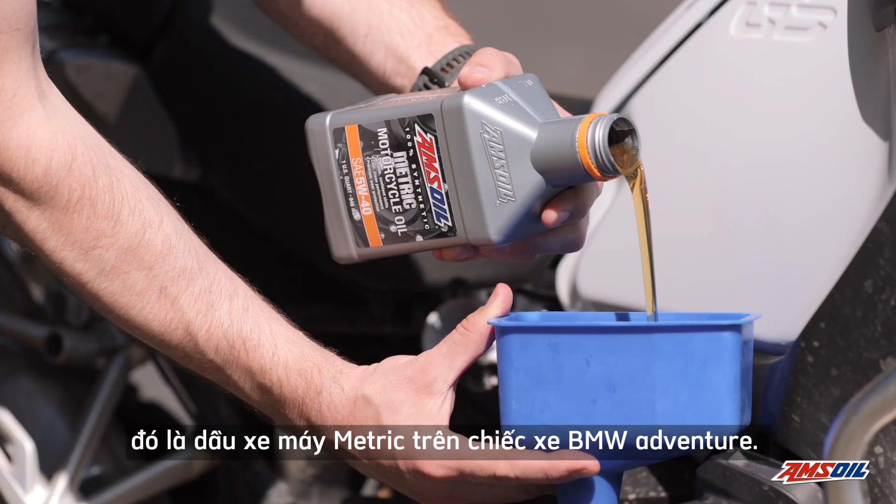Amsoil tested metric motorcycle 5W40 in a BMW R1250 GS. Let's see how it performed. At Amsoil, we're always testing our products. In this case, it's our metric motorcycle oil in a BMW adventure bike.

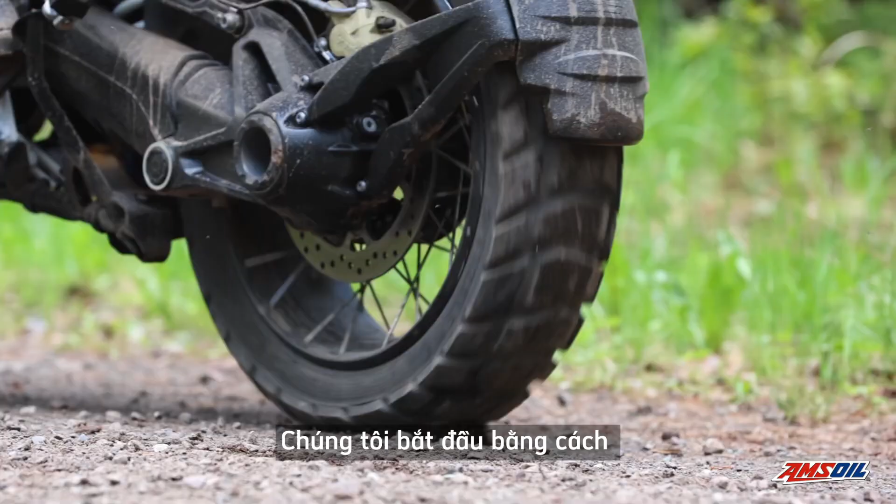So we ran at Amsoil what we call a proof of performance, or a POP. We start this out by putting a full array of sensors on the motorcycle. Then we're going to take it out and ride it in all of these different scenarios. So we did some off-road riding, we did some on-road, we did some in-town, we did some highway cruising. We basically covered all aspects of the adventure bike model, if you will.

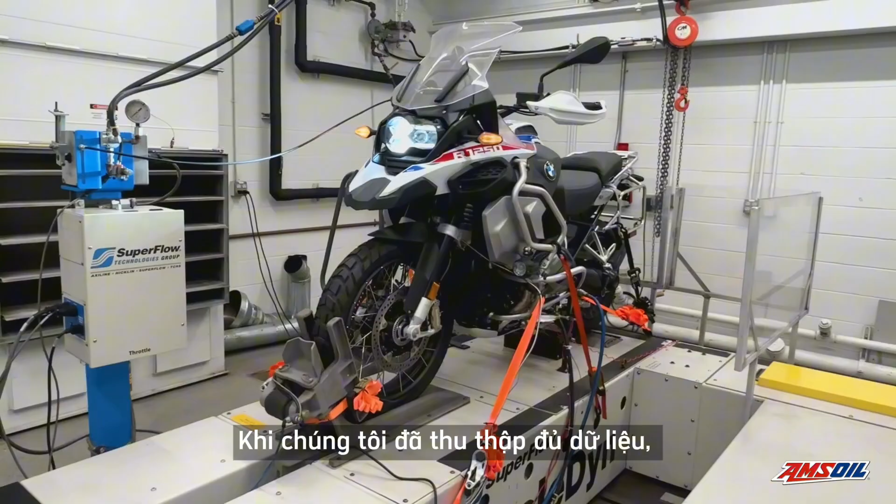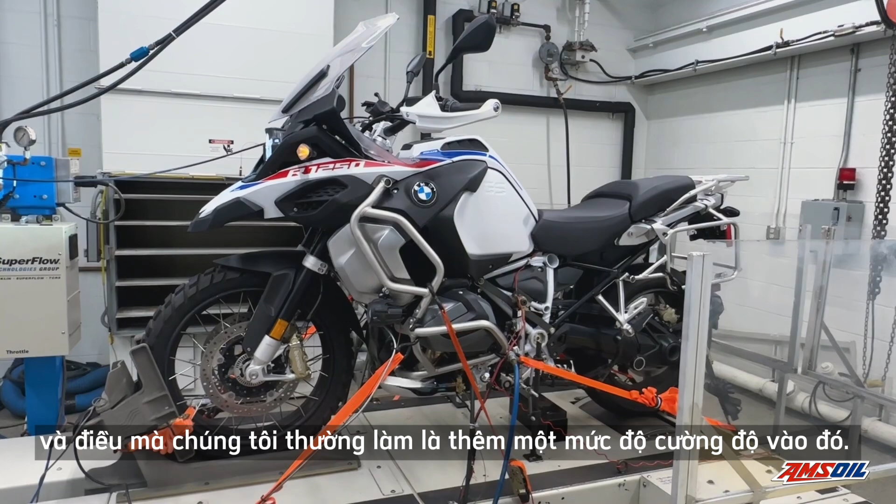Once we have all the data collected, it's off to the dyno. We will take all of that data that we've acquired and we'll replicate that. And what we normally do is we will add a level of intensity to that. In this case, we were 10 to 15% above what we saw in those different scenarios.

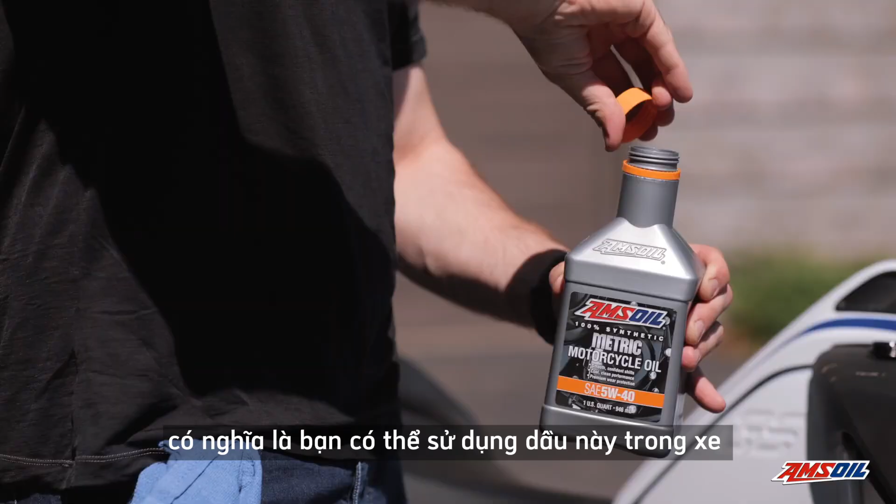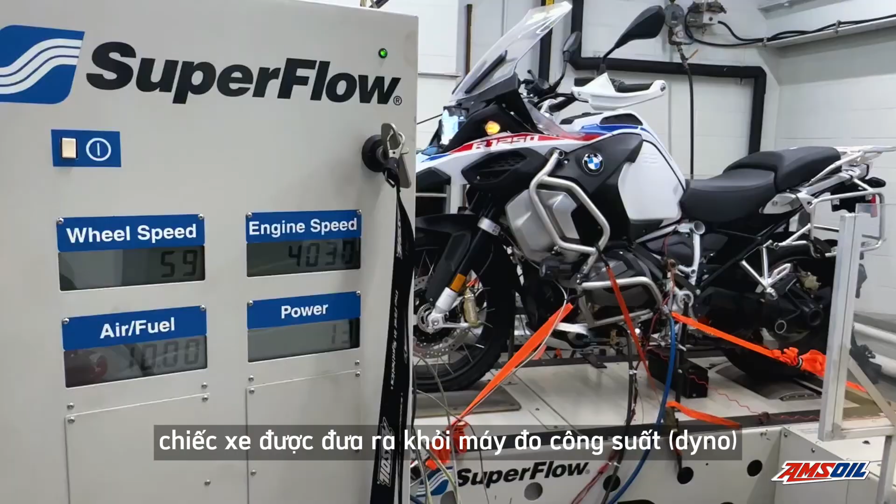The Amsoil metric motorcycle series of products comes with a 2x OE drain interval, which means you can keep it in there 2 times the manufacturer's recommended drain interval. Now, in the case of the BMW, that's 12,000 miles. So at 12,000 miles, the bike comes off the dyno and we start looking at the engine. Anything the oil touches, we're looking at.

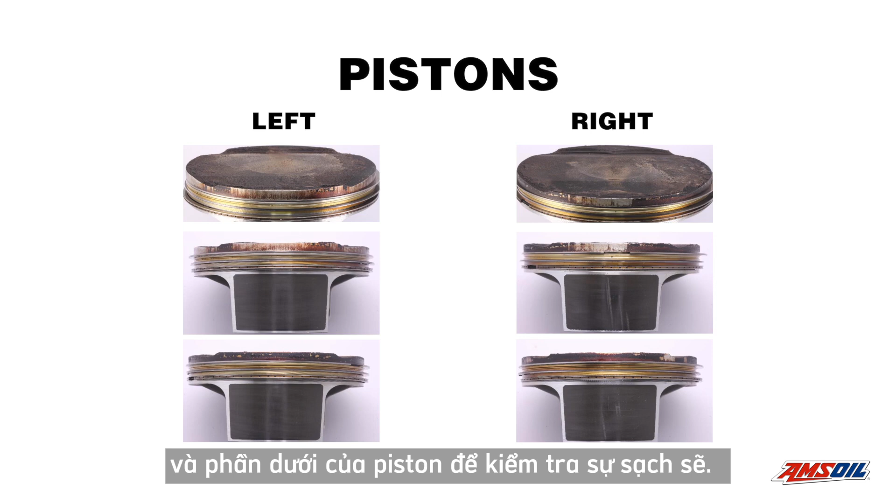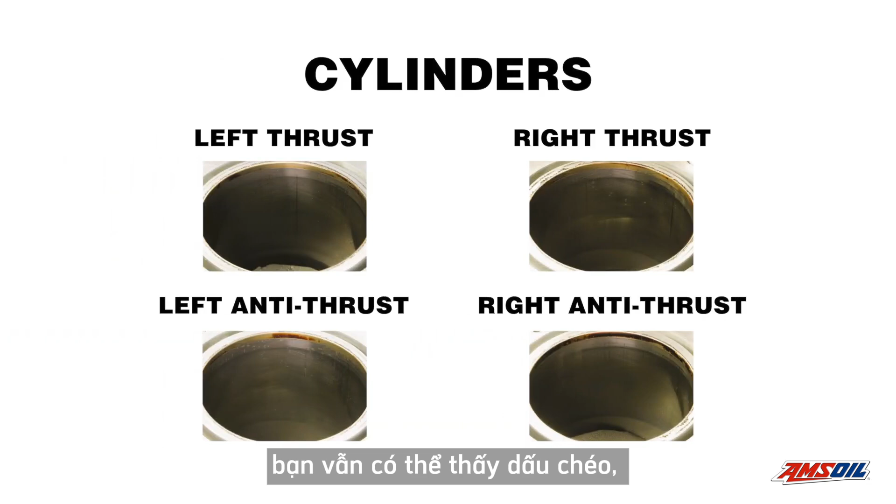Things such as pistons, we look at the piston crown, we look at the piston skirts for any signs of wear, we look at the undercrown of the piston for cleanliness. The pistons in this case looked great. The cylinders look great, you can still see the cross hatching. There's no scuffing, there's no wear of any sort.

As we get deeper into the engine, we look at things like the bearings, rod bearings, upper and lower shells, main bearings. In this case, all signs indicate the oil is doing its job. We also look at the camshaft. There is no sign of wear on any of the camshafts. The oil is protecting, the oil is doing its job once again.

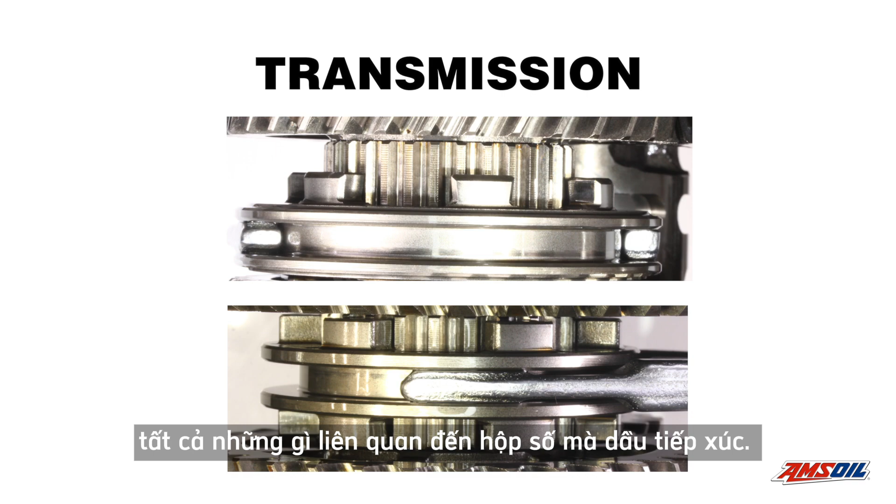This motorcycle is a shared sump, which means that the oil that's lubricating and protecting the engine is also lubricating and protecting the transmission. So in these cases, we pull the transmission apart and we look at all of the different gears. We look at the shift dogs. We look at everything related to the transmission that the oil touches. And in this case, it looked spectacular. There's no sign of any wear on any of the gears.

As you can see, this was a success. And the reason we run these proof of performance tests at Amsoil is to prove to you, the rider, that no matter how you choose to use your adventure bike, Amsoil metric motorcycle oil keeps your bike protected.